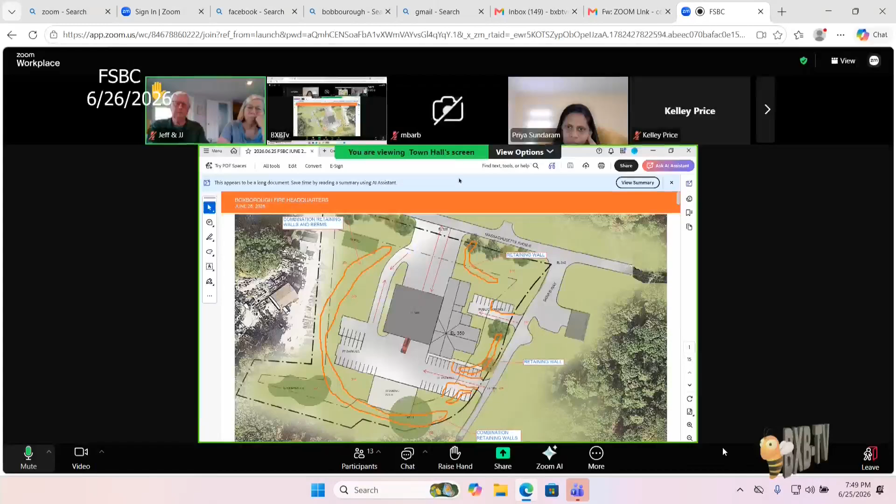Alan? You can't see it there, but if you look closely on a print, you have the elevation of the apparatus bay at 346. Yes. And you have the elevation of the admin building at 350. They'd be the same. I'm sorry? They should be the same, Alan. That's a misprint. Okay, so there's no stair between the apparatus bay and the admin building?

No. Yeah, on this plan, the black numbers are actually an initial study of different elevations for the building, for the grading, and then there are some red numbers that are placed in there, which are the most recent numbers that we've been working with. But the slab elevation of the apparatus is the final elevation that we're working with for this study. The admin should have been the same numbers.

And did I hear correctly, you said the engineer wants to keep the decline from the apparatus bay to the road at 5% or less? Hence, that's why you had to move it back, to make more of a shallow ramp rather than a steep ramp to the road. Right. And is 5% good with the chief? As long as it's within the standards, the safety standards for the apparatus and getting in and out, it'd be fine. You can go a little greater than 5%. We traditionally don't ever design apparatus slopes that are greater than 5%. So that's really our guide, is 5%.

And does the $3 million or so that you mentioned include buying fill for the site, or is it moving fill around that we already have? It's too early to be that specific, but it would be a combination of the two, I'm sure. Because we don't know the characteristics of all the material that's being removed. If it's being removed and being used on the periphery where there are no paved areas, that's a whole different situation. If it's fill that needs to be placed at an area that will receive paving, it may not meet the characteristics that you need for compaction.

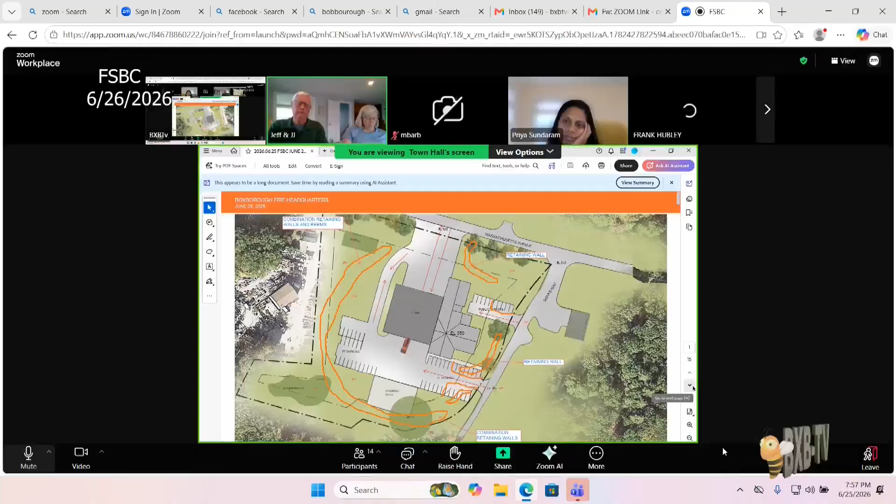Okay. And because we have to move the building back, we have to move the wells also? Is that in addition to the cost of the berms? No, what we did is we took the building plan, the parking plan, and we moved everything back. And you can see the round circle to the south of the building was the area designated as a possible well area. We would want to keep that designated area clear of construction for the wells. You are allowed to have paved surfaces over the well area, but we would not be looking to relocate it. We might be looking at 2 wells instead of 1 well. So that area is still the designated area for wells at this point. Thank you very much. Okay.

All right, should we go to the next slide? Sure. And now we're going to get into some of the options of looking at the building with either the 1-story or the 2-story admin, firefighter, residential quarter area, and the apparatus facing towards Sarah's Way. So this scheme, option 1B, has the apparatus more or less parallel to Sarah's Way as best as it can be. First line response is coming out to Sarah's Way and then out to Mass Avenue. Second line response is coming off the back of the apparatus and driving down the loop road that's right below the building. You may not be able to see it so well from here.

And then there is an entrance off of Sarah's Way close to Mass Ave, which is for visitor parking for the station. It holds about 6 to 8 spaces. And then further down Sarah's Way, there is an entrance for the firefighter personnel parking, and that has overflow parking behind the building. The elevation at the entrance off of Sarah's Way where the apparatus is ranges from 346 to 354. So we're locating the slab of the building at roughly 350.

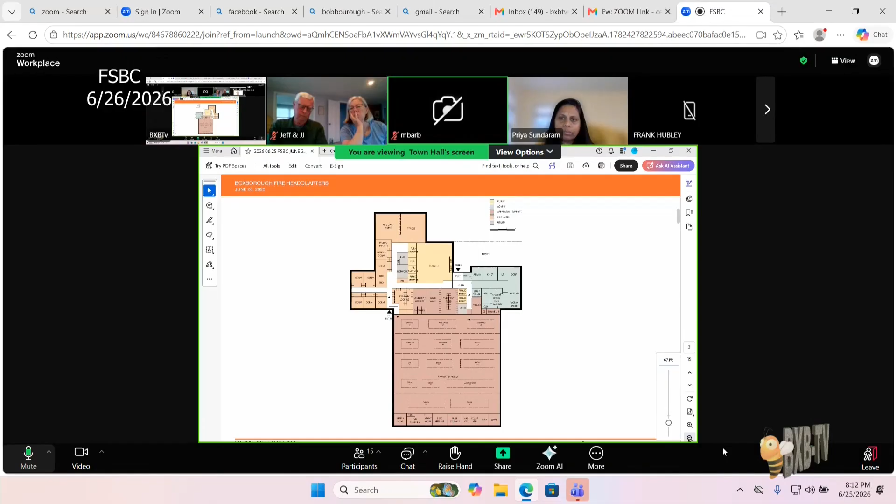Next page. I'm gonna try to make this a little bit bigger. I think if I close out this AI thing, and then make this bigger. Sorry, guys, I don't know how else to do this. You're doing great. How many do we have? Just one more packet. I don't need it, I have it on my computer. I think they have them. Yeah, they got it, okay.

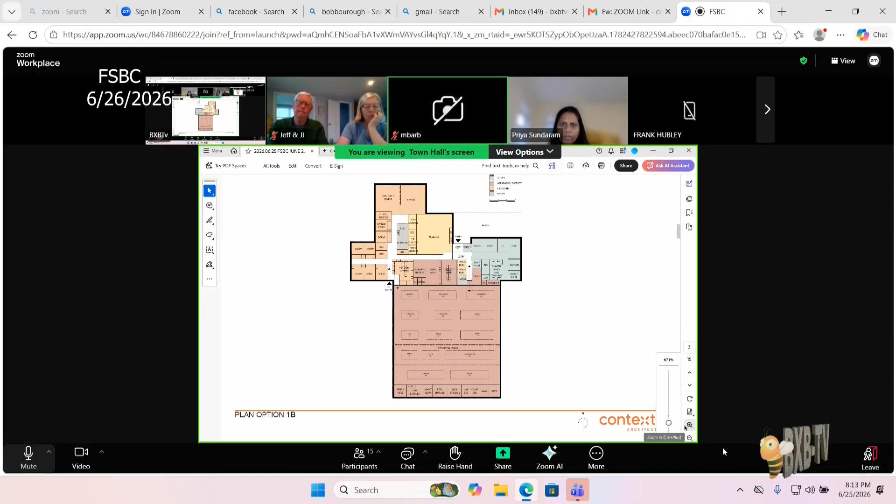So the next page is showing an interior layout; I have a few copies if anybody wants to look more closely. For every site plan we have here, there is a corresponding building plan. There is one site that has a number of iterations of building plans. This is a one-story fire department, admin office, and residential quarters on the north side of the apparatus bay. The main entry is visible from Sarah's Way. You can see the little arrow there between the yellow and the green shades.

So you come into the vestibule and the lobby. The lobby has bathrooms, watchroom, entrance to admin offices, and then access through to a triage room that brings you right into the apparatus. And then to the left of the lobby is the training room. And then beyond the training room are the fire department dorm rooms, the day room, kitchen, fitness room, and the per diem lockers.

On the back side of the building, where the other arrow is outside, is the firefighter entry. So where the firefighter parking is, the firefighters would come into the rear entrance of the building and be able to access the dorms as well as the per diem lockers. The public would always come in through the front at the vestibule and lobby.

All of the schemes you'll see have support spaces on the opposite side of the apparatus bays. Those are spaces for equipment and/or workspaces or storage rooms for the apparatus and firefighter needs, as well as a stair tower which can be used as a training tower. And this is one story? One story, yes.

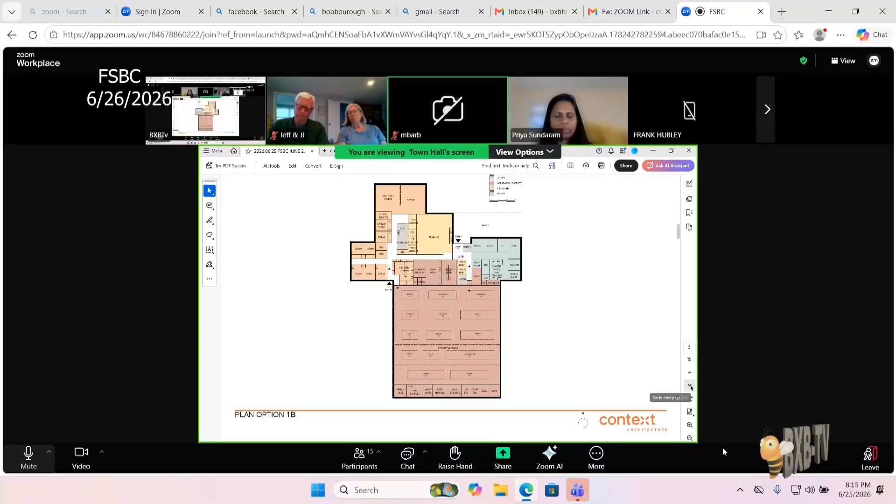So, Chris, in the space needs study, I remember reading about command cars and certain trailers that are going to be under canopy. Where's the canopy? We haven't actually located that yet on the site. Okay. But there would be one in this scenario? Yes. Okay. Next page, everybody? Okay.

So as I explained earlier, we did show a couple of schemes that have the exit onto Mass Ave, and this is just one of them. This is again a one-story scheme with the apparatus facing Mass Ave, showing that all apparatus would leave via Mass Ave and return via Mass Ave and drive around the back of the station for the second response.

Still would have visitors lot off of Sarah's Way by the entrance to the admin portion of the building, and then a second entrance off of Sarah's Way for the firefighter parking only. So no apparatus would be using Sarah's Way in this scheme if the decision was to proceed to create a new opening at Mass Avenue.

But although the layout is different on this one, it would still require all of the berming and everything else. Excavation. Exactly, yeah. Unfortunately, I think there's maybe 3 schemes that have a Mass Ave entrance. You would require the berming and the walls. Okay. Do you want to go back? Oh, no, that's good. Okay.

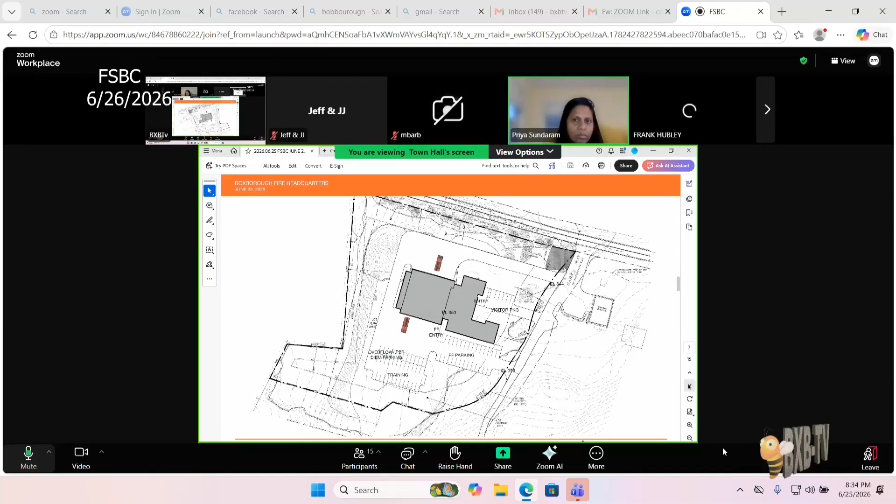And then further up Sarah's Way, there's a small visitors lot where the visitor entry to the building is. Then further up Sarah's Way is the firefighter parking lot. That's where the firefighter personal vehicles are to be parked, as well as overflow parking for the per diem firefighters and a training area.

And then the next page is the plan for this design. You come into the public entry off of Sarah's Way, and there's a training room to your right. There's the admin offices to your left. You have direct access off the lobby to a triage right into the apparatus room.

If you are there to see someone in the administrative offices, there's a watchroom, then the administrative person, the chief, lieutenant, captain, and conference room, and a passage that is open to those offices, meaning it's secured from the lobby, but it's open to all the offices, and that leads you down to the residential quarters of the station and also to the firefighter entry.

So firefighters still come in on the backside where the parking is. They come in, they can go right into the apparatus, or if they're per diem, they go right into the per diem locker room. If they're the staff firefighters, they would proceed to their dorm rooms or day room, kitchen, fitness room, still with access to the apparatus and to the administrative offices.

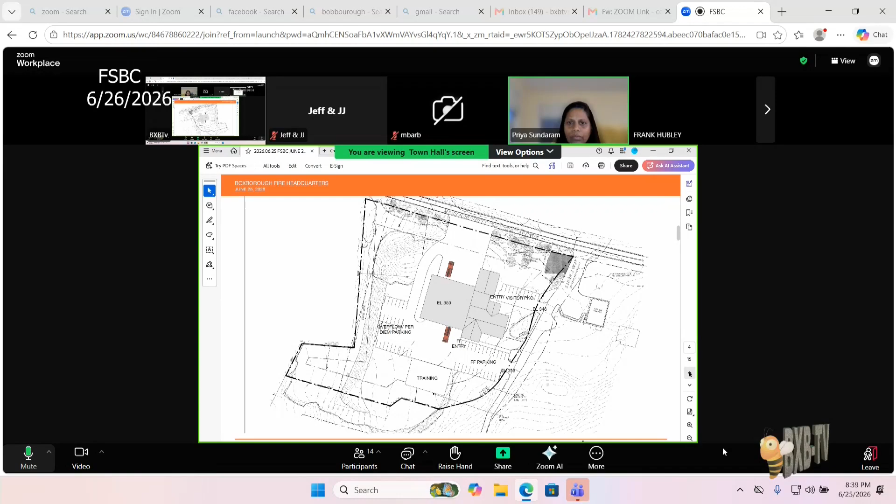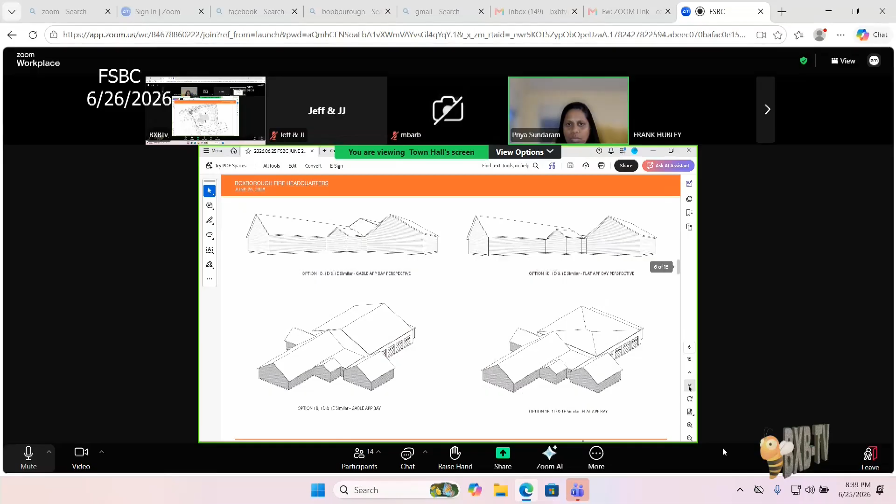But in our office, we feel site plan option 1B, which has a slightly tilted apparatus admin portion to Sarah's Way but provides more of a clean direction to Mass Ave, appears to be a direction we want to pursue more. As far as the design of the admin quarters, personally, I find the scheme that provides full security to all of the firefighters, whether per diem or staff, and the chief, lieutenant, and captain, all within one area where they can freely go from one space to another without crossing into a public space, is preferred.

So is that plan 1C that I have up? 1C. Okay, I just want to make sure I have the right one up. So our thought would be to take 1C and flip the admin residential portion so that you have a clear, visible entry from the intersection of Sarah's Way and Mass Ave. That would be something we want to explore next.

By flipping, what does that mean? Right now, you have the training room on the right side and the residential on the left side. We'd flip it so you would have the training room on the left side and the residential on the right side. You would do that only if you rotated the building? Right, you flip it and you rotate it. Because I was trying to figure out how to get it back to what Mary's question was.

If you rotated the building like 1B but used the layout of 1C, in that rotation you want the public to be able to come in quickly. To do that, you'd have to flip training with living. That makes sense. It's worth playing with that and seeing if you can do that. I do think this interior layout is better.

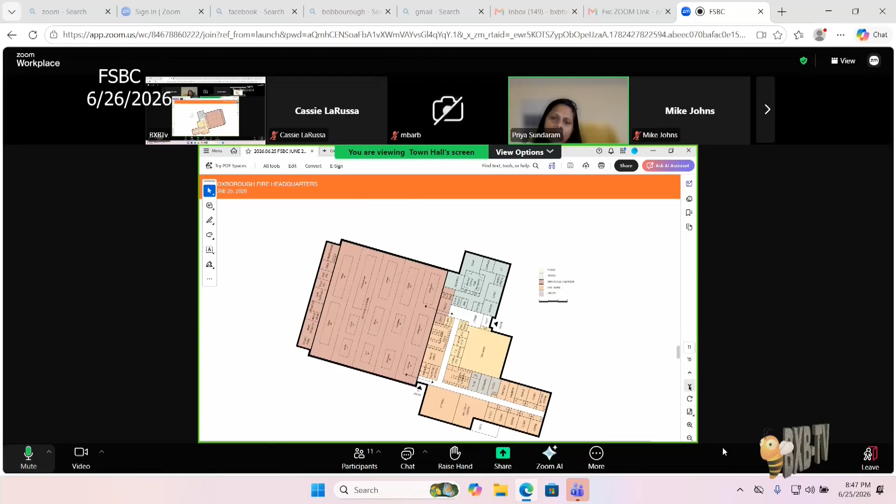Okay. All right, another iteration. We did a lot of iterations. And this one, again, has the double 90 to get out to Mass Ave, so less ideal than the other site plan we looked at. It's a one-story admin residential quarters. You flip to the next page. The difference in the plan here is now the administrative offices are on the right of the lobby, the public lobby, bathrooms, and the training room is on the left. And then you have the firefighter quarters down beyond the training room.

So unlike the last plan, if you were a firefighter who is also working in one of the stations in the admin portion, you would have to cross over the public lobby to get to the offices. So it's less than ideal. But it is just a different iteration of a layout for a one-story scheme. I should say the labeling of these, the A, B, C, D, E, really don't have any relation to how they were developed. I'm not too sure how that happened.

You didn't do a massing study on D? D is a variation of the one we just looked at with the two gables. It's similar to C. This one? Yeah, the one Maria liked. The one I liked. Yeah, massing option 1C is applicable to option D and applicable to option E. It's the one that's up on the screen. They're both sort of L-shaped layouts. Your gables would just be different.

And then the big long gable that hits the apparatus, you just have crickets to drains, is that what you do? At this point, I'm not so sure yet. That's okay. I'm not a big cricket fan. I'm not a cricket fan either. But I don't like interior drains either. I've always learned that you should put them on the outside of a building. Don't take them to the inside.

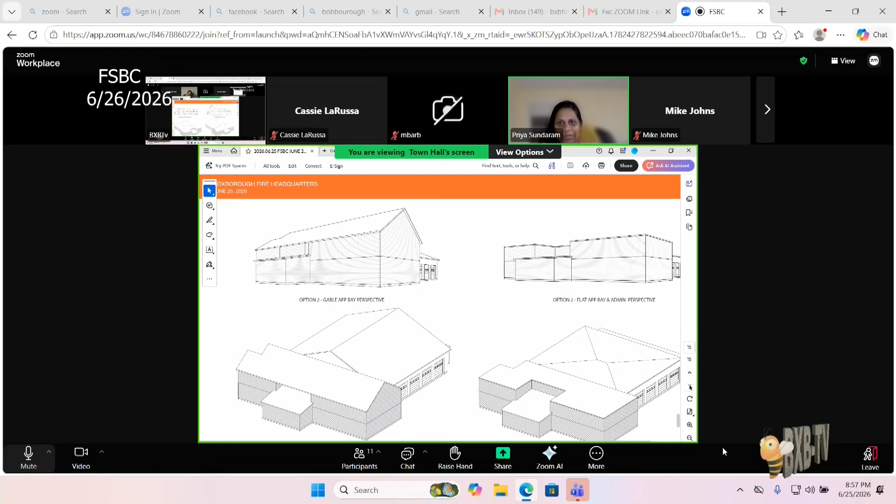And then the other part of that is, I understand we're jammed for space, but the fitness room being on the first floor, yet their clothes and all their stuff would be upstairs. When the emergency comes in, there's no place to change back into your clothes to go back out to the trucks with your uniform on. You'd have to run up a flight of stairs to grab your belongings while someone else is running down the stairs. Flow-wise and operationally, it just doesn't function. But you could have a fire pole here, though. I don't see it here, Mac. If it were there, I'd be sold, but otherwise I'd say they can change in the back of the truck.

We're spending a lot of real estate having two stairways and an elevator. Yeah, that seems like a lot of overhead. So my question is, I understand it's early, but we've already determined we don't want the admin and the living quarters on opposite sides of the building, right? So let's not spend a lot of time trying to make that work. When do we say we don't want two floors, we'd really like to see if we could do one floor, because that's what the chief wants? I don't know the process. I'm gonna look at Chris for that.

Well, I think there are a couple of reasons you would continue looking at the two-story scheme: if it was advantageous for the site layout, if the configuration of the building on the site required a smaller footprint. I don't think you necessarily have that situation on this site. Or if it was proven to be a little less expensive. I know there's an elevator and two stairs, but sometimes a smaller, more regular footprint is a less expensive building. The more jigs and jogs you have, it can get more expensive from an excavation, forming, and structural perspective.

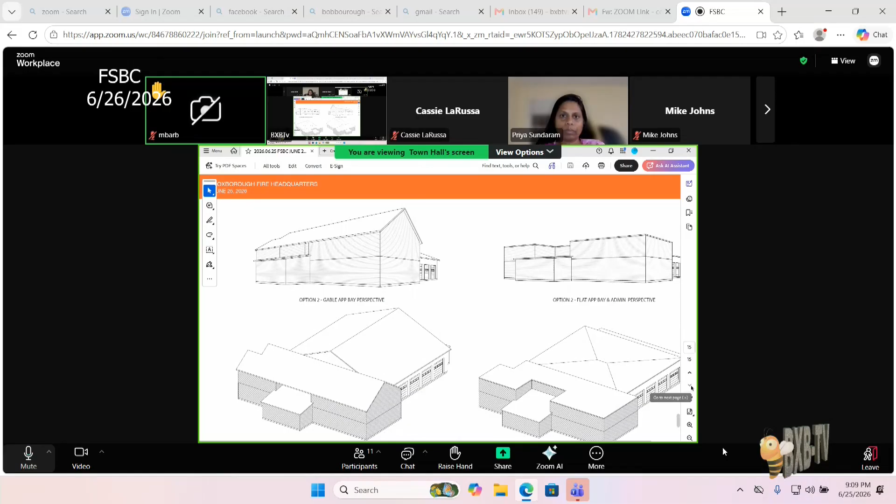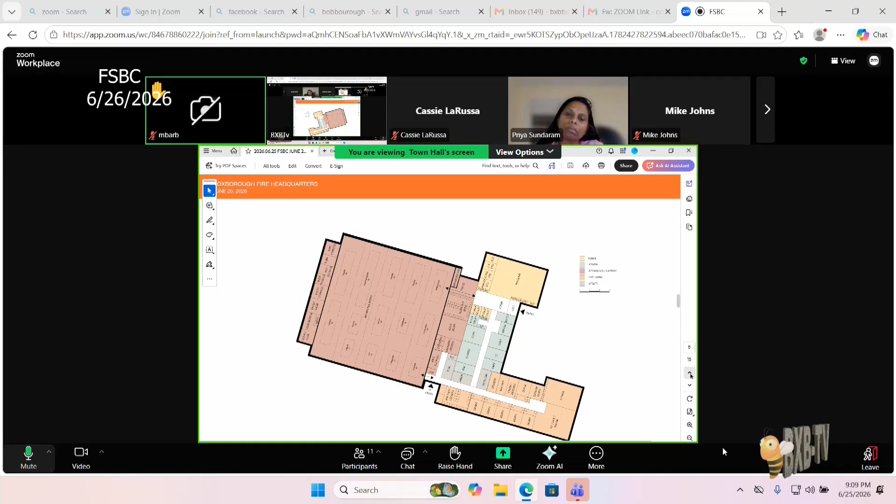I have one more thing. I know that we liked option 1C. I feel like what I'm going to say is kind of counterintuitive because I don't care for the two-story building because of operationally how it doesn't work. But at the same time, option 1C appears, and I know it's conceptual, I get that, but it appears to develop a lot of the property, whereas some of the other options, the site looks slightly less developed because of less paving and everything. I get that we're conceptual though. Right, so if we can find that balance of like less developed site but also functional building and everything.

Yeah, Sarah, you're absolutely right. I mean, we're tackling everything in multiple different ways, and as is somewhat evident in the presentation, there are some schemes that are a little further along on the site, some less, and some more developed in the building, some less. I think reducing the number of options we have allows us to present a more thoughtful, tailored approach each week to those fewer schemes.

The other thing I was looking at as I was flipping through them, after we were talking about the programming of having the admin near the day room and the other space, it looks like that can be moved around.

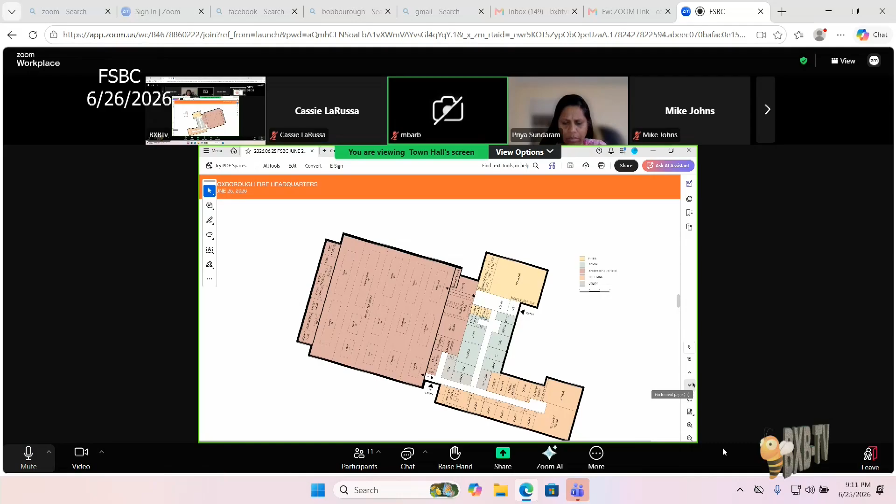You can, on any of the plans. It just depends on which one we finally choose. Yeah, I think the goal is to have that type of contiguous relationship of spaces. Exactly. So that you have a separation of public versus firefighter spaces. Right, to that point, I would say we liked 1C because it has that admin and living space not interrupted by public. But in the end, if the kitchen and dining room is here or there and dorms here or there, for me, that's the chief and his staff's decision, how they're going to move through the building on a day-to-day basis. Yep, I agree.

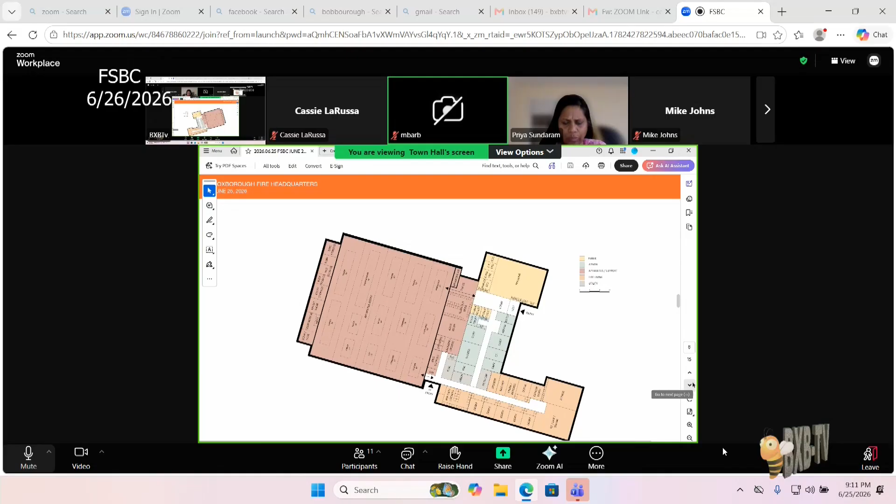Unless you asked for, like, the Taj Mahal. Within reason. Within reason. But you don't. 19,999 square feet. Taj light. Are we done sharing this?

I think so. But I just want to make sure. So are we in agreement keeping a 1C approach and a 2-story approach for them to develop those more fully? And 1C being the way the layout is, not necessarily this L shape, but that the admin and the living quarters are together, however that works out. Right. Yep. That's what we're talking about with the 1C.

We want the apparatus bay sort of facing Sarah's way, to the extent possible. To Mark's point, we can tip it now, but until we know what's underneath the ground in specific places, we may have to tilt it less, move it back, do this, do that. Right, so the normal sequence is when you come up with a concept design that appears to be hitting most of the criteria you have, then that becomes the layout that you use when you decide where you do your borings and your test pits. Yeah. So that would be the natural progression.

When are you going to want us to be more definitive? Next meeting. Next meeting? Okay. Yeah, I started putting together a more detailed schedule, which is really focusing on what the goal would be for each fire station building committee, and what the presentations would be at the working group meetings leading up to the fire station building committee meeting, and how that fits in with our overall schedule of starting SD, ending SD, starting DD, ending DD, and so forth. And there's certain milestones we really have to hit to make sure that we meet the March 2027 date.